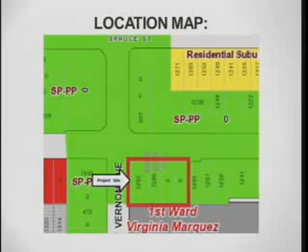The next slide is the aerial photograph. So that's the site as the report indicated. The overall property is comprised of 4 separate parcels. If you're looking at the slide, the site is in the red rectangle. The larger building sits on one property. The adjacent structure, which is the subject of the expansion, is on another property. And the parking lot is essentially 2 separate parcels. As part of this, it'll all be merged into one project. We have the rail yards to the south, and commercial uses on the other 3 sides. 5th Street runs from left to right on the top of the slide, and the street running on the left hand of this property is Mount Vernon.

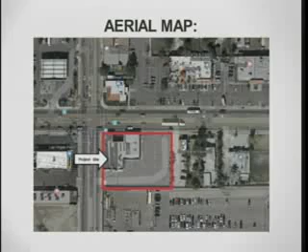Next will be a series of slides showing the property. This is looking east on 5th Street, where the subject property is on the right-hand side. Next is looking west on 5th Street with the subject property on the left-hand side, where you can see the sign that says Pepe's on the corner. That's the location. The next slide will be looking on Mount Vernon towards the north, and the next slide will be Mount Vernon looking south.

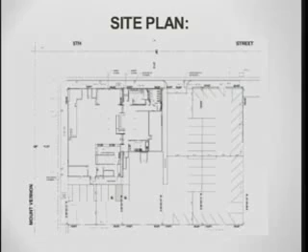Next slide. This is the site plan. So again, as indicated, there are 2 separate buildings now that would be converted into one structure, and the parking lot to the right-hand side there.

Next, please. This is the floor plan. So you have the dance and assembly area in what would be the existing structure, and then we have the kitchen, restroom facilities, and some other seating area on the part that's going to be part of the conversion.

We have the elevations for the next slide. The next slide is in the report.

We talked about when we addressed the parking requirements. The property for this nightclub is required to have 95 off-street parking spaces. There are currently 51 provided on site. We have required the applicant to get approval from one of the neighboring properties, which is the center to the northwest of the site across 5th Street, so there is consideration for 65 spaces to be provided there to address the parking requirements. That's approximately 350 feet as you cross crosswalks, go up and across - between 300 to 400 feet walking distance.

The next slide. This is the boundary as delineated with the black border line. That's the census tract boundary, for census tract 49.00, and it lists the 6 on-site alcohol licenses within the census tract. The area encircled, with the triangle marked 1 and the square marked 2, delineates a 1,000-foot radius.

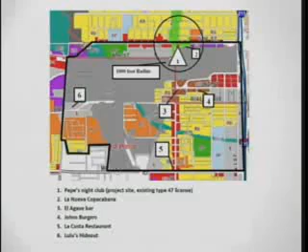The next slide will show that in closer. So that's where. The number 2 is the Copacabana, which the commission approved, I believe a couple of years ago - another nightclub which is under new construction. They're moving forward with that as well.

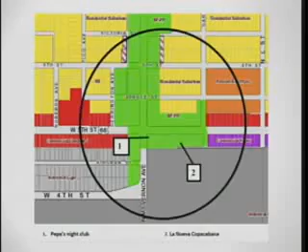Thank you. Does the commission have any questions for staff at this point?

Just a quick question - I believe you mentioned that a lot merger would be required to merge those lots into one single lot. That's correct. And I was trying to find the conditions of approval that would require that. If you would help me out, to make certain that we have a condition of approval that would trigger that requirement to complete the processing of the lot merger - if I can't find it, we could make sure that we include it as a recommendation. Yes. I appreciate that, thank you.

And while you mentioned that, I did also want to include a condition requiring that the applicant maintain the agreement with that adjoining property owner for the off-site parking up on the other side of Fifth. So those two we would like to add. That's a good one, thank you.

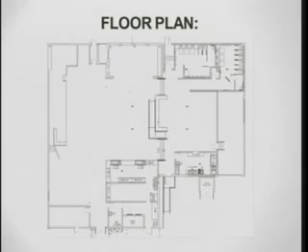Thank you. You're welcome. I had actually a few more questions.

For condition number 1 in the conditions of approval, it says there'll be lighting while the establishment is open, in the exterior, like in the parking lots and such. Could we maybe amend that to have it on more regularly? I know it's a commercial area, but having that light could help law enforcement if any activity happens in that area. The Santa Fe is right there, maybe helping out for the community, just having a lit area somewhere safer if someone is walking in that section of town.

Okay, so it's listed as condition number 1 within the staff report, and in the resolution it's listed on page 7 as condition number 15. So you would like to add language to possibly have it on a little more regularly than just on the days the establishment is open? During the week, with nighttime hours, just for the safety of the neighboring area, just precautions like that.

I would also, along those lines, they have a requirement for surveillance cameras outdoors, and maybe that's something we might want to encourage or require to keep on 7 days a week. That'd be perfect, so that we don't have people hanging out there on a Wednesday night when they know the business owners are closed. So do we have a consensus of what time? Like 8 to 5 in the morning, 6 in the morning, I'm just throwing numbers out there. I don't know what's reasonable. A dusk-to-dawn thing would be good. Yeah, just for protection, and it'll help prevent maybe crime happening in the area.

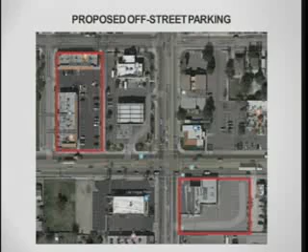From the proposed map, I'm seeing they're going to be crossing an intersection to get across to the actual structure from the parking lot. Are the traffic signals timed to accommodate large amounts of people crossing the street during and coming from those events? Will that be adjusted for the increased capacity during that time, or how will that work?

That has not been contemplated. I don't know how we would address that, what the timing is on that, but that's something we could look into. I don't know if there's an appropriate... we're looking at the late evening hours, so I don't anticipate that there's that many cars traveling up and down the street, but we're open to suggestions as well.

Right, just the concern, because I know it's going to be late at night, some people are going to be drinking or buzzed, leaving or exiting the club. It may pose a potential hazard. That's why I was curious about the timing. I don't know if that's an engineering issue that would have to be worked out, or what would remedy that, if it needs remedy, but just a comment.

Does the commission have any further questions for staff or the applicant at this time? All right, I'll entertain a motion.

Mr. Chair, I would recommend you formally close the public comment period. Thank you, counsel. At this time, we're going to formally close public comments, and we will entertain a motion.

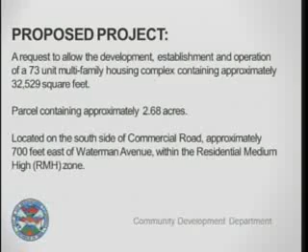So item number 4 is Development Permit Type P 18-05, a request to allow the development, establishment, and operation of a 73-unit multifamily housing complex containing approximately 32,529 square feet. The project site contains a total of 5 parcels on 2.68 acres, located, as stated, on the south side of Commercial Road, approximately 700 feet east of Waterman Avenue, and it's located within the residential medium-high RMH zone.

A public comment letter was received from 7th Street Development. They currently own the properties just to the north of the project site in the industrial light zoning.

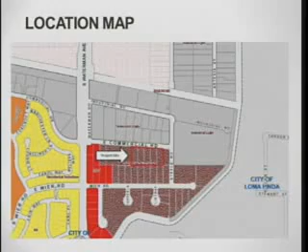The project site is currently vacant, with very little vegetation or trees on site.

Again, the project site is vacant. This is looking from the southwest property near Steel Road, then looking south from Commercial Road, and looking southeast from basically where the Telecu senior apartments are located.

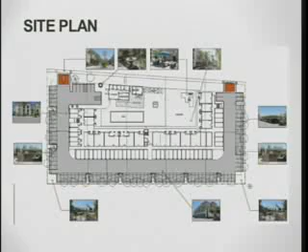The enclosed parking is directly adjacent to the buildings, basically on the south, east, and west side. The additional parking is covered.

The proposed landscaping is going to upgrade the site considerably. There are 4 different floor plans contemplated, for the studio, 1-bedroom, and 2-bedroom apartments.

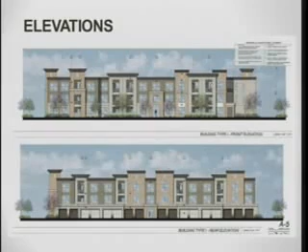The elevations are fairly modern and well articulated, with lots of variation in the roof line, facade, and color treatments.

The Planning Commission recommendation is to adopt Resolution 2018-072 and find the approval of Development Permit Type P 18-05 to be categorically exempt from CEQA pursuant to Section 15332, infill development projects, and approve Development Permit Type P 18-05 based on the findings of fact and subject to the recommended conditions of approval.

Before any motion or discussion, I have one correction for the resolution. There was reference to Kendall Drive regarding upgrades, but that was a typo. It should be Commercial Road. That's already been changed, it's just not reflected in the reports you have currently.

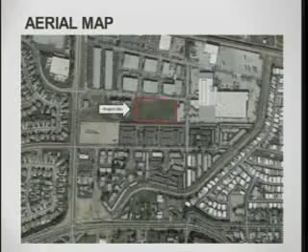7th Street Development owns 2 of the 12 buildings. 7th Street Development is also the manager of the Commercial Business Association that manages all 12 of those buildings. If you look, those 2 long buildings in the front are the 2 that we own, and then behind there's another 10 buildings. Some of them are joined — they look like 1 building, but they're actually 2. There's 10 more buildings, so there's a total of 12.

The other thing I'd like to point out, when we talk about the 2005 specific plan, traffic studies were done back in 2005. That's the last time these intersections were studied, as I understand — Mr. Mojica can probably correct me — but the specific plan was last updated in 2005, and those were the traffic studies at that time. So it's been a long time, and unlike maybe some other parts of San Bernardino, this part of San Bernardino is thriving, and we hope to keep it that way.

I think hospitality is doing well as well. But we've got a lot of Loma Linda here — a lot of businesses that service the hospitals. So we do have truck traffic in and out, and we do have cars. So those are the concerns. Okay, thank you.

Yes, do we have an opportunity to comment on the comments? Oh, absolutely, proceed. Not to — and again, these gentlemen probably don't remember, but we have worked for their company in the past on other properties, and they were very professional and very good to work for. So again, I hold their company in the highest regard.

They're definitely good at what they do. But I just want to reiterate a couple of things. One is with regard to the maintenance of the streets. We all know the city streets all need repair and maintenance. As Ms. Powers indicated, we're going to do our part to rehabilitate, as is typical with any project, within the frontage of the property. What the city does with revenues generated through gas tax and other programs that go into the city's CIP program — this might be one of the areas they may want to target, or at least have some information brought forward to the Planning Commission about what is expected in the surrounding neighborhood.

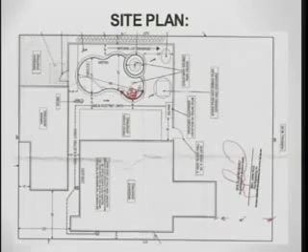So we just wanted to discuss some of these items. Our code requires - and one of the common errors or oversights is - whether a pool is considered a structure, and whether it should comply with setback requirements. Our code requires a 15-foot setback from the property line if you're on a corner side yard. If it were a patio or concrete slab, it doesn't have a setback requirement, but a pool is a structure. So essentially the corner of the pool here, where my shaky hand is, where the light is, that needs to be 15 feet from the property line. It's actually less - about 1.5 feet from the property line.

And then the fence - the building code requires that if you have a swimming pool, you have to have a minimum 5-foot high fence surrounding the pool for safety purposes. And so what happened was the pool was installed.

Our recommendation is to remedy this, and looking at the properties, again, single-family area, we believe there is a special circumstance as it relates to this property because essentially the only yard area was the front yard and this side yard here. So we felt there was a unique situation because it was a corner lot and the limitations of where usable recreational space could be used.

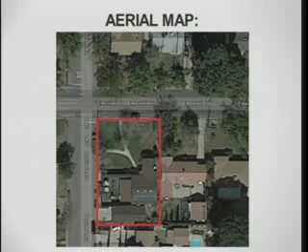So you can't go past the prevailing setback? No, I don't think so, but never mind. Okay, I understand that. Thank you. You're welcome.

Through the chair, I have a question for staff. There's one part of this I don't quite understand. The request is to allow the reduction of the required street yard setback from 15 feet to approximately 18 inches.

So that means we're bringing the property line to 18 inches from the curb? No, the property line—the property is 10 feet from the curb face. Okay. And then basically the way the code is written, if we take the curb face as a point of reference, you go 10 feet, then you go 15 feet for your setback, and that's where the edge of your pool can be. So basically 25 feet from the curb face is the literal interpretation of our code. Likewise, if you wanted to put a fence above 4 feet, you also had to be 25 feet from the curb face, 15 feet from the property line.

So what we're doing—because of the way the pool was constructed, the dimensions that were provided—once we did the math and the measurements, it works out that the edge of the pool, as constructed, is approximately 18 inches from the property line. Okay. And so then they're going to put the wood fence on the property line as proposed, and there'll be that 18-inch gap between the fence and the edge of the pool.